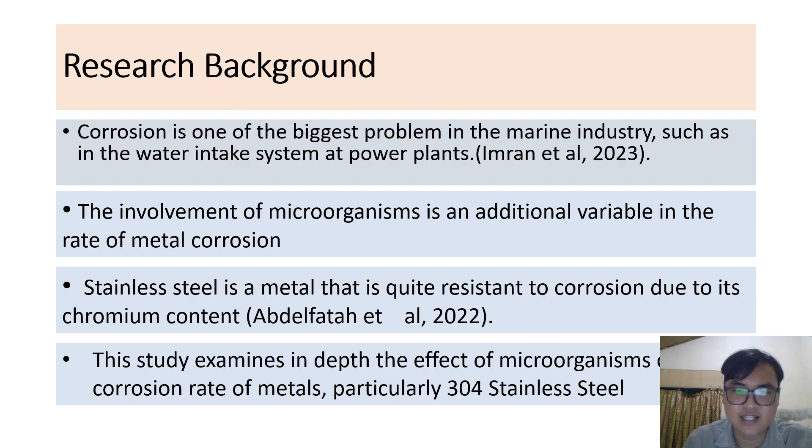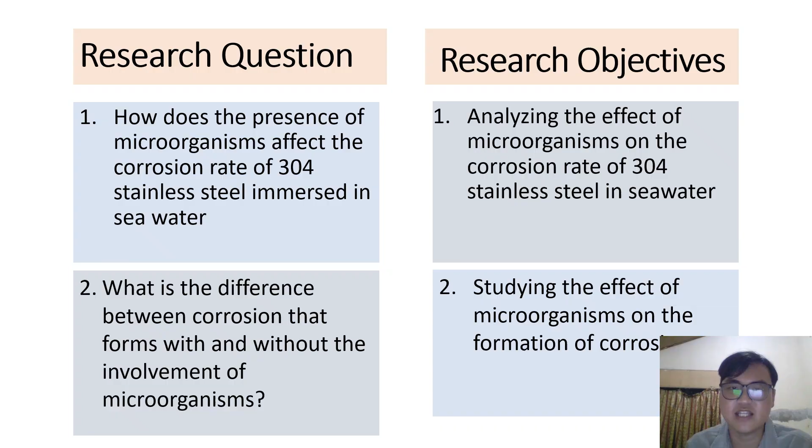Based on this background, this research addresses two key problems. First, how does the presence of microorganisms impact the corrosion rate of stainless steel 304 immersed in seawater? Second, what are the specific differences in the corrosion forms created with and without microbial involvement?

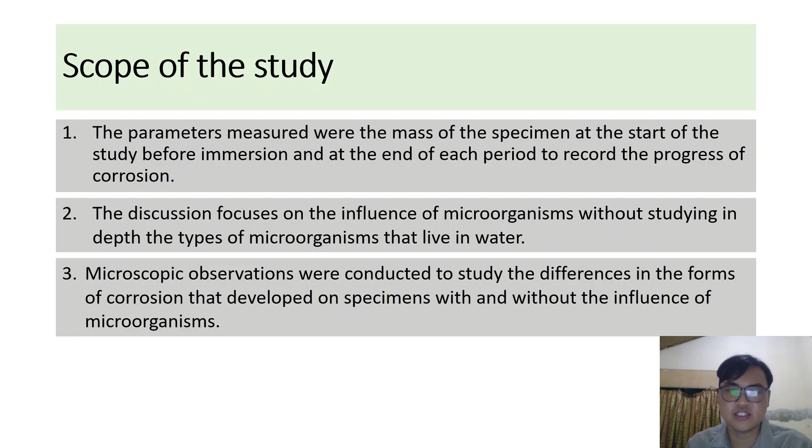To ensure focused results, I established specific boundaries for this study. We measured the corrosion rate using the weight loss method, recording mass changes at the end of every period. Our discussion focuses on the effect of microorganisms in general, without deeply analyzing specific microbial taxonomy. Finally, we utilize microscopic observation to compare the physical forms of corrosion between biotic and abiotic environments.

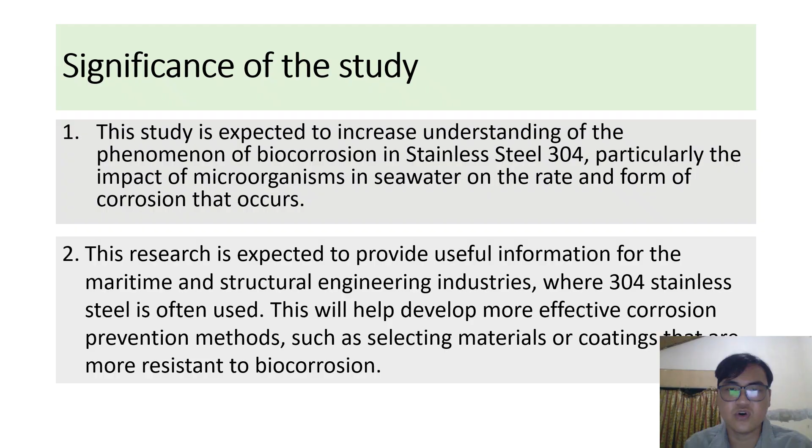The significance of this research lies in two areas. Academically, it enhances our understanding of the biocorrosion phenomenon and the specific impact of biofilms on stainless steel 304. Practically, it provides vital data for the maritime and structural engineering industries to develop more effective corrosion prevention methods, such as selecting better suited materials or coatings for biologically active environments.

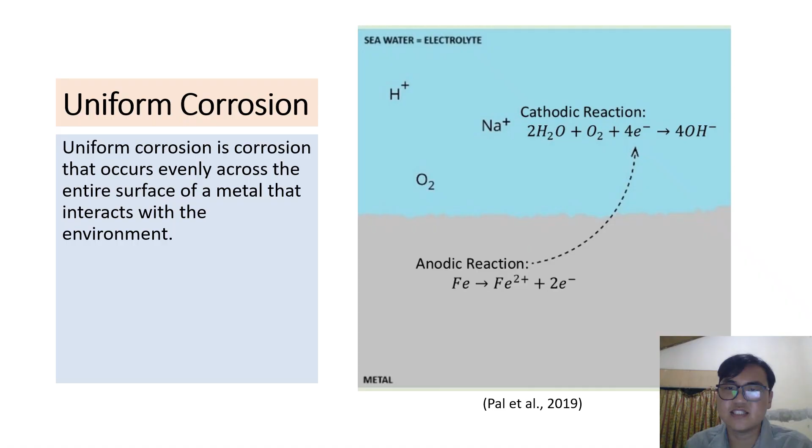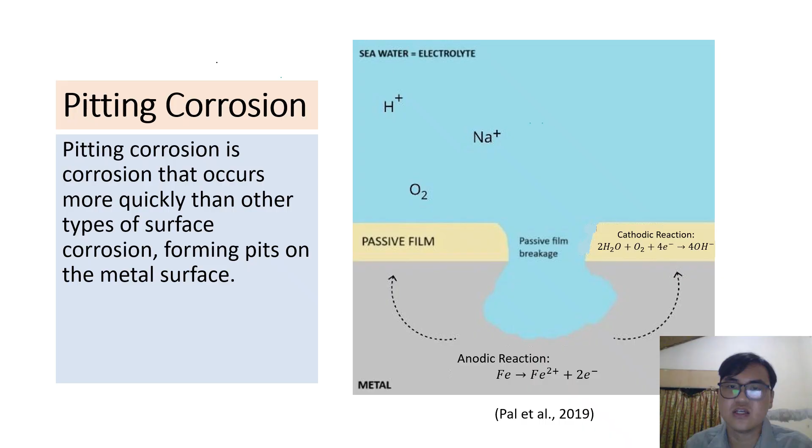One common form of corrosion is uniform corrosion, which occurs evenly across the entire metal surface. However, stainless steel 304 generally resists this well, due to its strong chromium passive layer. A more dangerous form for stainless steel 304 is pitting corrosion. This occurs rapidly and forms deep localized pits on the surface. It occurs when the protective passive layer is breached, often by aggressive ions like chloride found in seawater.

Crucially, we also have biocorrosion, or microbiologically influenced corrosion. This is corrosion initiated or accelerated by microorganisms. Their metabolic activities can damage the metal's protective layer and facilitate oxidation reactions.

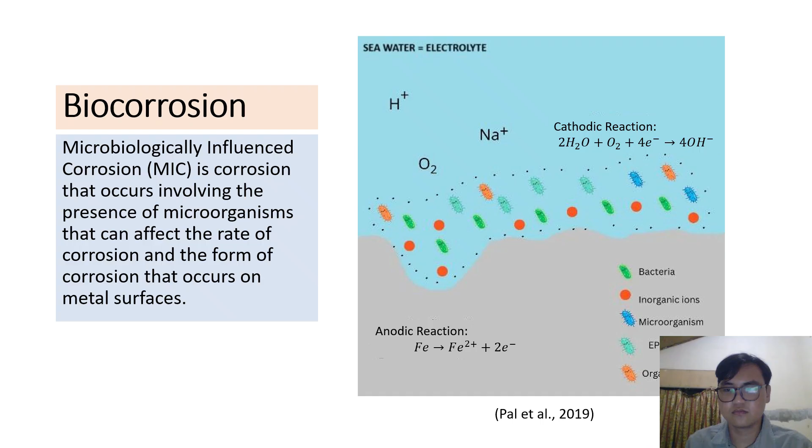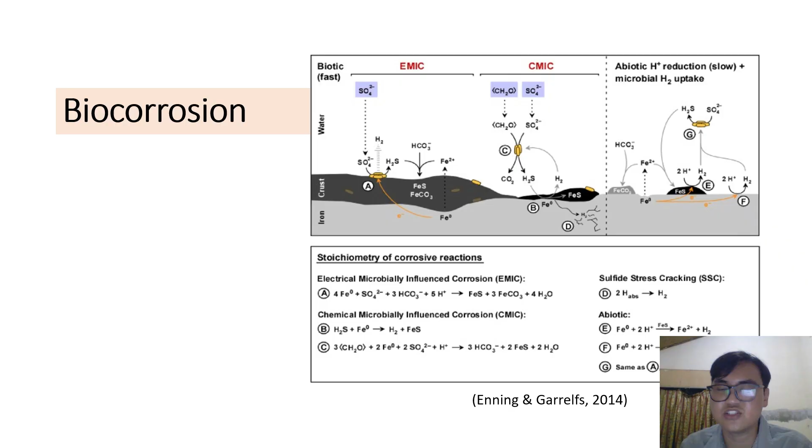Central to biocorrosion is the biofilm. This is a layer of microorganisms embedded in an extracellular polymeric substance matrix adhering to the metal. Biofilms can trap high concentrations of corrosive agents and alter the electrochemical conditions at the metal surface, acting as either a trigger or an inhibitor for corrosion.

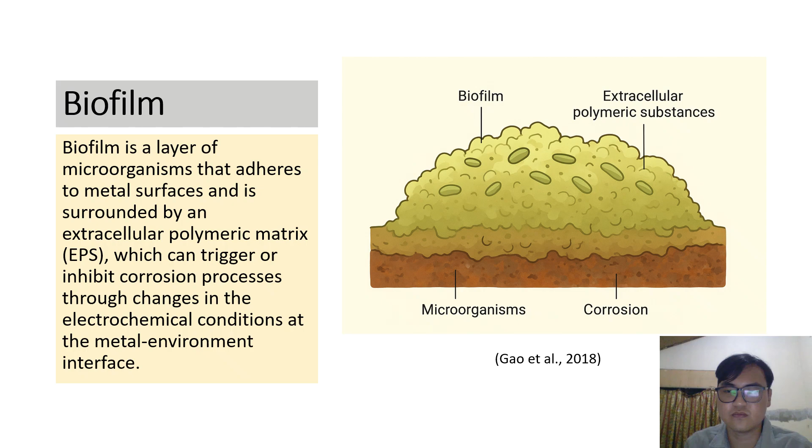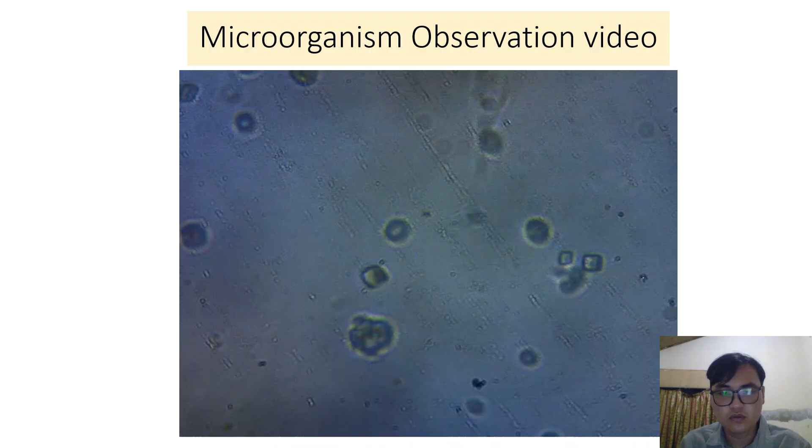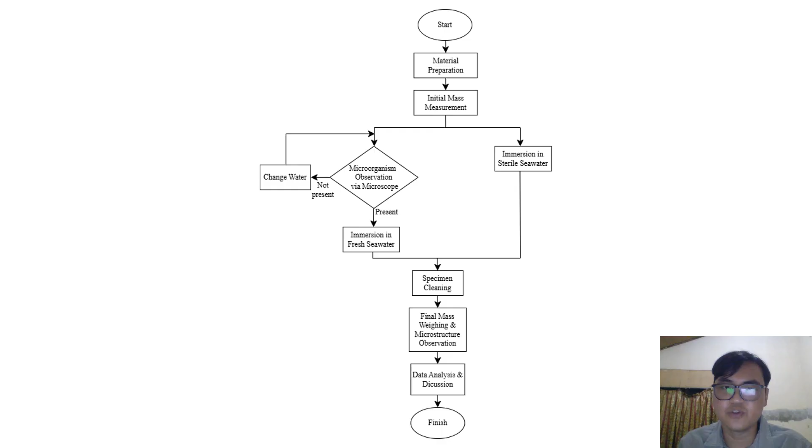After every period ends, which is 1 month all the way to 5 months, the specimens immersed were taken out of the water and cleaned by brushing. After ensuring the specimen has been thoroughly cleaned, it is weighed and its microstructure was observed. The weight data is then used to calculate the corrosion rate of the periods measured. After the last period group of specimen data has been collected, the data was analyzed and used to conclude this study.

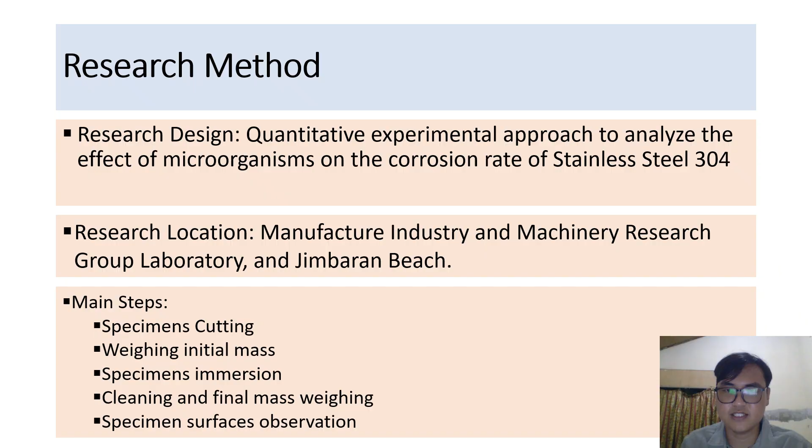Moving to the methodology, this study utilized a quantitative experimental approach. The research was conducted at the Manufacture Industry and Machinery Research Group Laboratory and used seawater collected from Jimbaran Beach. The process involves specimen preparation, initial weighing, immersion, and final analysis.

Our procedure begins by weighing 30 specimens of stainless steel 304 with a high precision scale. We created two immersion environments: fresh seawater that was replaced every 2 or 3 days to maintain live microbial activity in the water, and sterilized seawater, which was boiled to eliminate the microbes in the water.

After immersion, we cleaned the specimens and weighed them again to determine mass loss. We then calculated the corrosion rate in 3 different units: grams per month, percentage weight loss per month, and mils per year. Finally, we observed the surface microstructure using a metallurgical microscope.

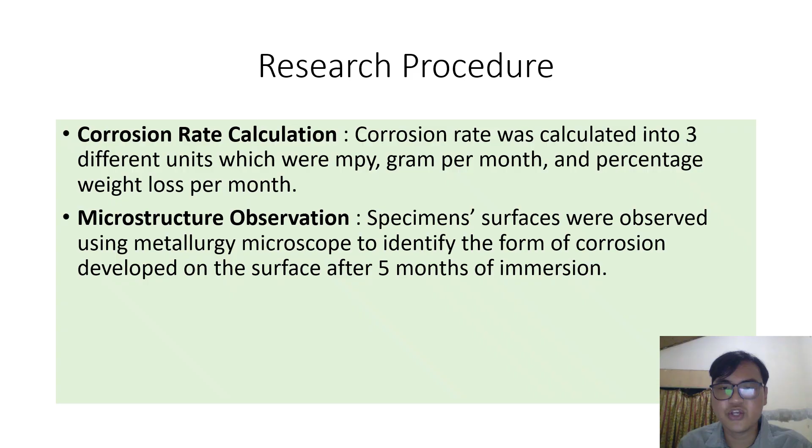The variables used in this experiment were divided into 3 types: the independent variable, which is the presence of microorganisms; dependent variables, which include the corrosion rate and surface corrosion from the samples; and control variables, which are the material itself and the environmental conditions. To ensure the consistency of the environmental conditions, we immersed and placed the specimens in one place.

We utilized standard precision equipment including digital scales, metallurgical microscopes for surface analysis, and a laser cutting machine to ensure precise specimen dimensions. The other apparatus were a container, clamp, kettle to boil water, PVC pipes, a glass base to mount the resin, tweezers, hair dryer, sliding caliper to measure the dimensions, and brush for cleaning purposes.

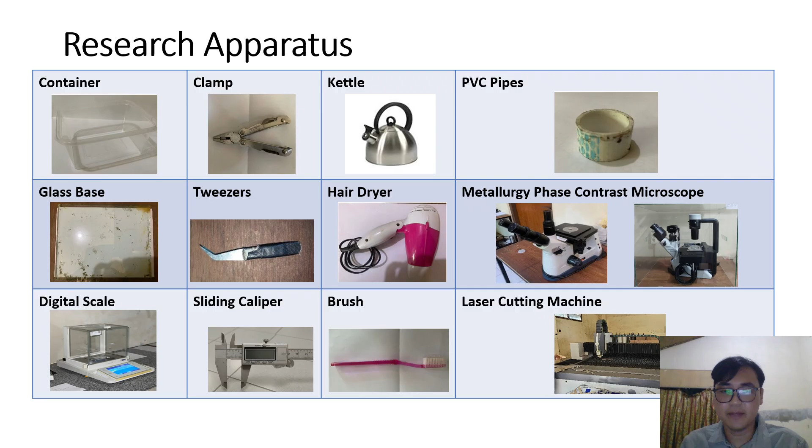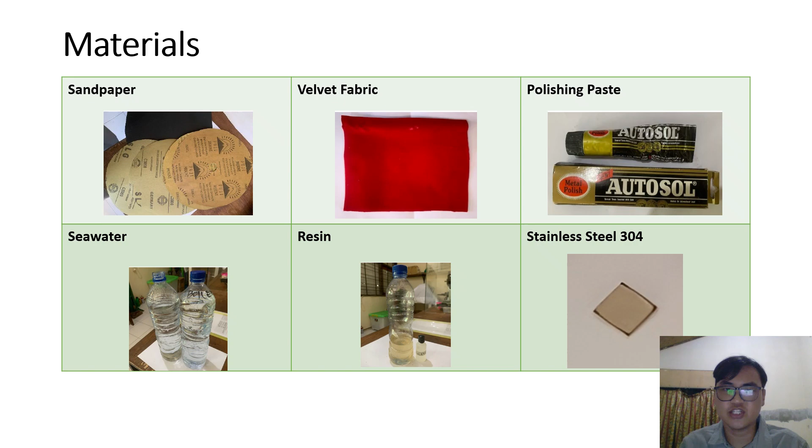The primary materials used were stainless steel 304 plates, Jimbaran seawater, resin for mounting specimens, and polishing materials like sandpaper and velvet fabric for microscopic preparation. This research timeline spanned 5 months, from October 2025 to February 2026, allowing us to capture the temporal evolution of

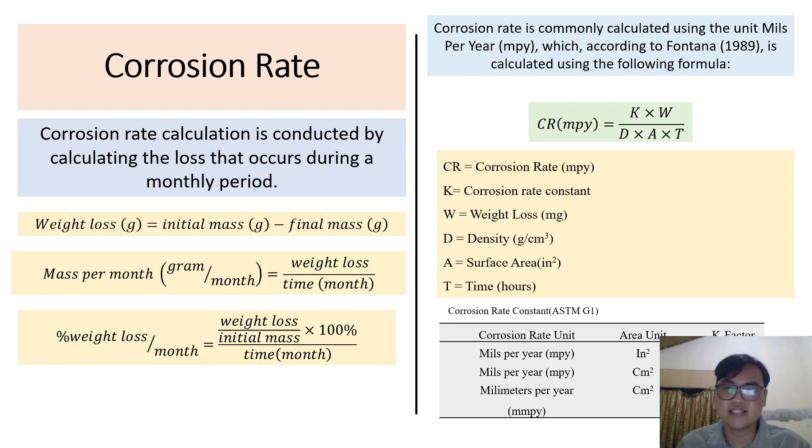the corrosion process. To quantify our results, we used the standard ASTM G1 formula to calculate the corrosion rate. We focus on mils per year, which integrates weight loss, density, surface area, and time. This standard allows us to predict the remaining life of a component. We applied the appropriate K-factor constants as per ASTM G1 standards to ensure accurate conversion between units.

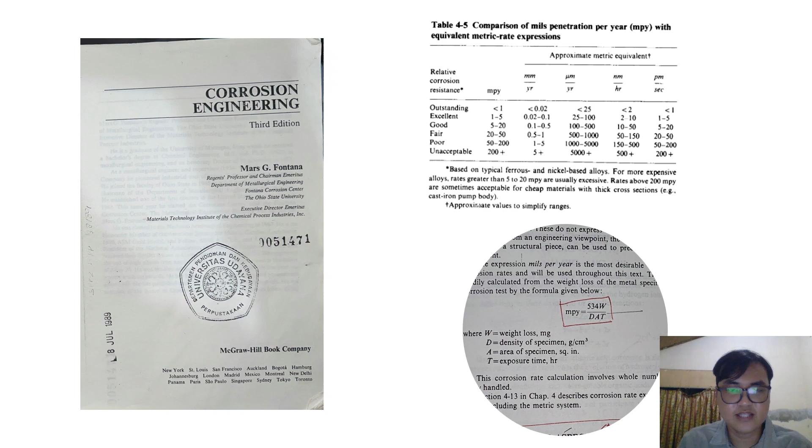Because stainless steel is a higher value alloy than cast iron, a rate in the fair range, which is 20 to 50 mils per year, might actually be considered too high for stainless steel. The table and the formula used to calculate the mils per year were taken from this book titled Corrosion Engineering, written by Mars G. Fontana in 1989.

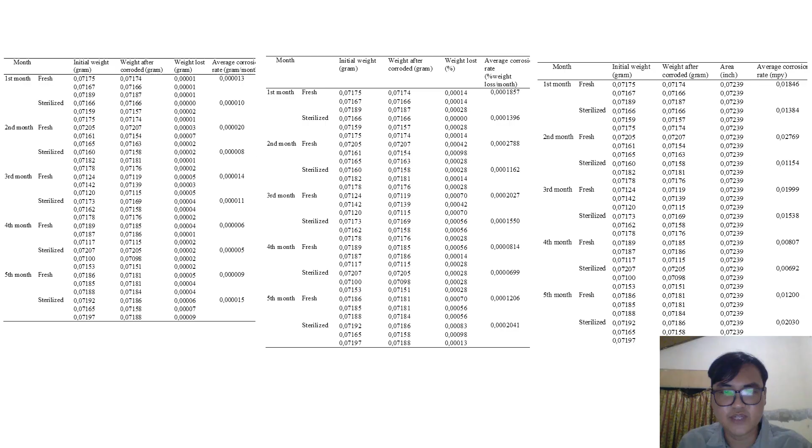This table presents our monthly data. A critical finding emerged here. The corrosion rate in the biotic environment fluctuated. It was high initially but decreased later. In contrast, the sterile environment showed a steady increase in corrosion rate, eventually surpassing the biotic rate in the final month. This phenomenon is known as a crossover.

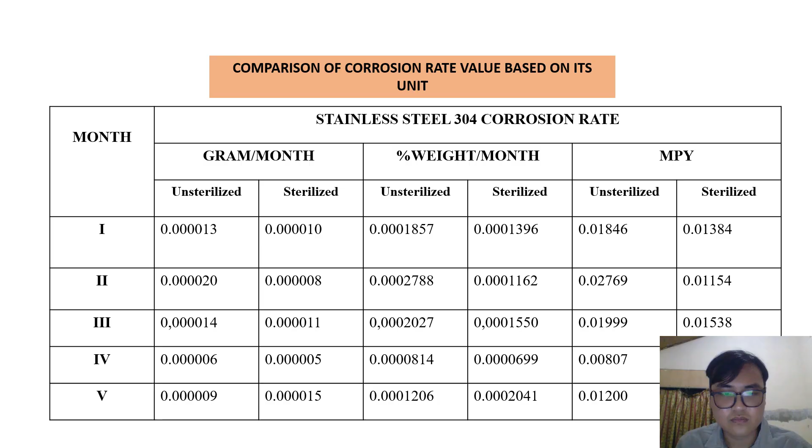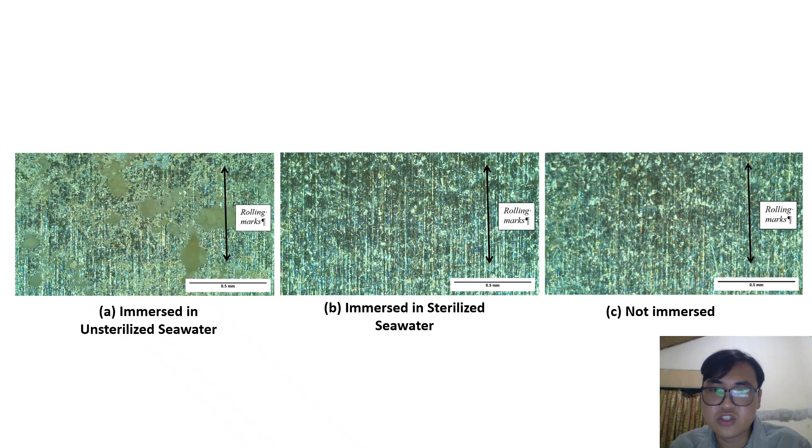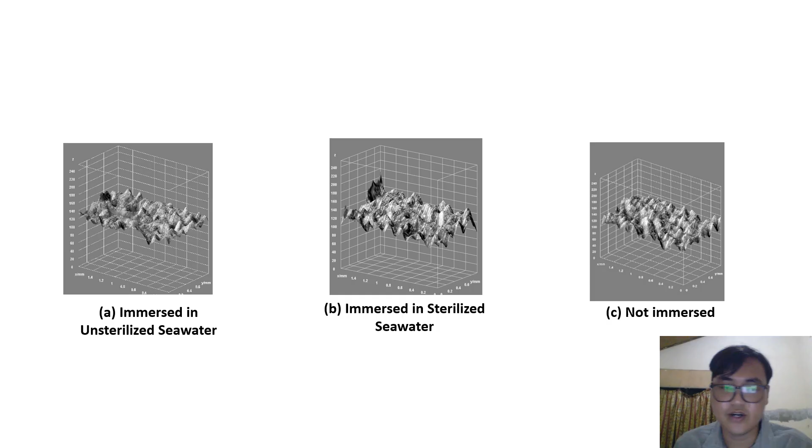To conclude, the presence of microorganisms causes the corrosion rate to fluctuate. It is high initially due to bacterial activity, but decreased later due to the inhibitory effect of the mature biofilm. The sterile environment eventually becomes more destructive in the long term due to the accumulation of stable pitting corrosion caused by chloride ions. This is the crossover phenomenon. Morphologically, biotic environments result in uneven, patchy corrosion with iron sulfide deposits, while sterile environments result in deep localized pitting.

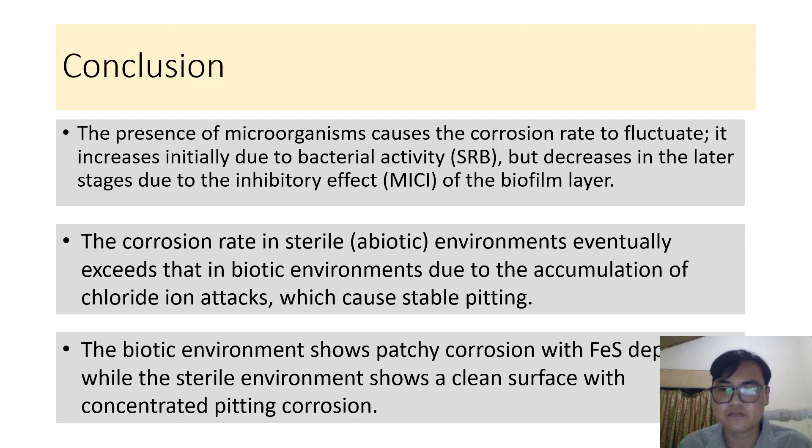For future research, I suggest extending the research duration to verify if the high corrosion trend in sterile environments continues permanently, and conducting molecular biological tests to identify the specific species involved in the biofilm. And this concludes my presentation.